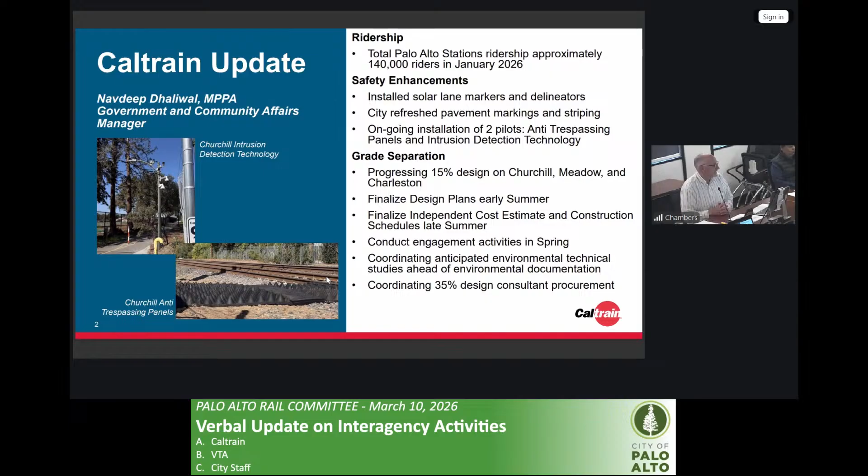So those are pretty significant changes, and there are other elements to the plan. They actually said in the report, and I'm not sure how the math changed, that the previous plan would cost $231 billion. But the headline is that they've reduced the cost by $2 billion. So I just wanted to share that and let you decide what to make of it.

Okay, so our next update is, do we have anything from VTA? No update from VTA. Okay, and that takes us to the city staff report.

Good afternoon again, Ripan Bhatia, Senior Engineer with the Office of Transportation. Next slide please. We have a few project updates ongoing that we've brought forward to the Rail Committee previously. The first one is the Bike and Ped Transportation Plan update. The draft plan was reviewed by PTC in November and recommended for adoption, and is going forward to the council review on May 7th. It's open to the public if you have any interest from the community to provide feedback. The final adoption of the Bike and Ped Transportation Plan is tentatively scheduled in early June. Next slide please.

There's another safety improvement project currently in progress at Alma and Charleston, also funded through California Public Utilities Commission's Section 130 funds. The city recently had a community meeting, late last year, seeking input and feedback from our community. It was a great meeting with good input, and staff will take that input into consideration as we move forward with the design.

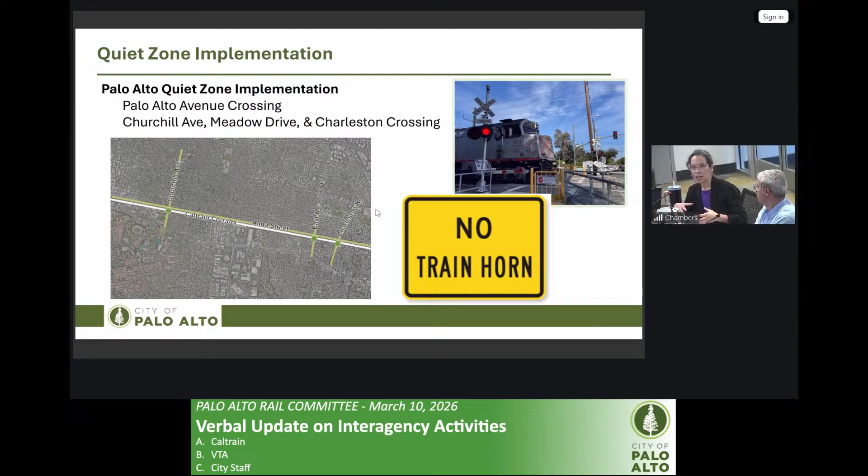So there are two different types of safety improvements. The ones Ripan was talking about are safety improvements on the city side, relating to the signals. The ones Navi was talking about are safety enhancements on the Caltrain side, including the anti-trespass panels and the sentry system. So you can speak to the plan for those.

Yeah, so we anticipate, we're pending installation for Alma Street for the anti-trespass panels, and we're expecting those within the next week to two weeks. And then for the rail sentry at Alma, we're anticipating that will be installed on March 16th. So does that answer your question?

Rail Sentry was already installed at Churchill in the spring, and in recent weeks it was installed at Meadow and Charleston, and will be at Palo Alto Avenue soon, as Navi said.

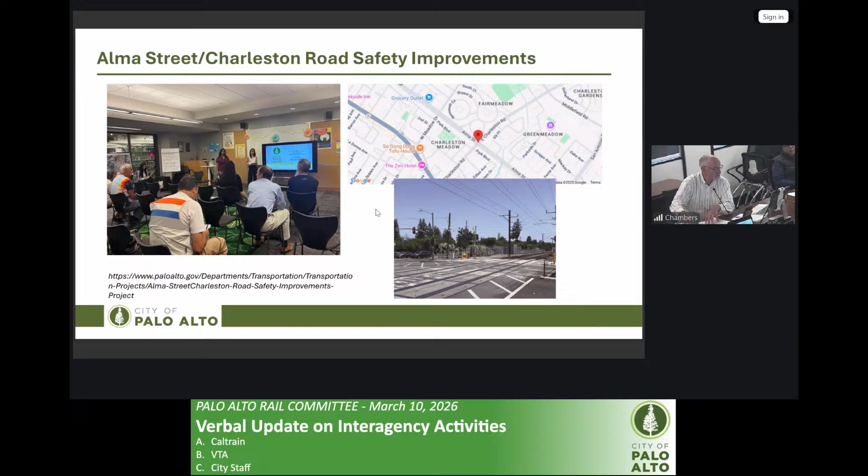The anti-trespass panels have already been installed in just the last couple of weeks at both Churchill and Meadow, and they will also be installed at Charleston and Palo Alto Avenue in the next couple of weeks.

And the rail sentry had already been installed before the latest tragedy, right? Yes. The rail sentry is a good technology, but is not designed to address the sort of circumstance that occurred recently. On top of that, even within what it is designed to do, which is to improve both safety for vehicles and prevent trespassing.

It's far from a fail-safe technology because it requires the LiDAR or video cameras to detect either a predetermined pattern of a vehicle or person being where they shouldn't be for too long, or with the AI, some irregular behavior. But then it has to go to the dispatch with the company that owns Rail Sentry, then to our dispatch to the trains and stop the train. Each of those is a lag time.

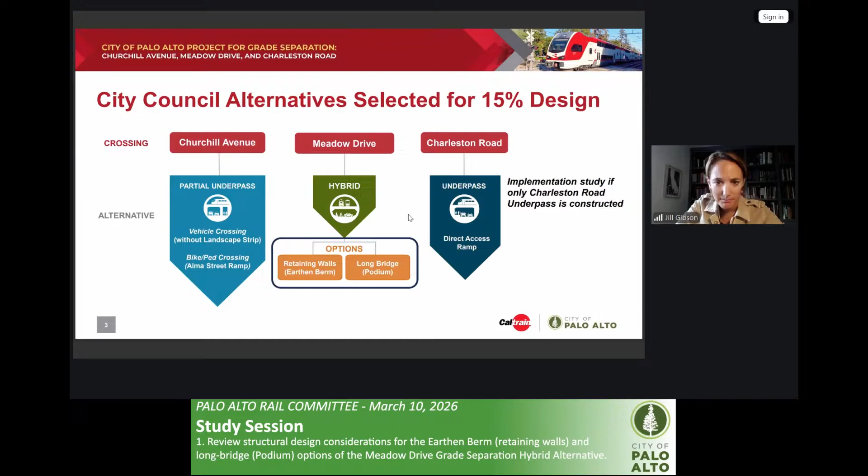So just to recap our schedule. When we last saw you, we received direction for that first arrow, direction number 1, to identify the alternatives to advance to 15%. The team is now proceeding with that direction and advancing that 15% design. Today we're checking in to discuss the Meadow Drive options. All of this is working towards the second decision point, in advance of the 35% design and environmental clearance, to provide any update or refinements on which alternatives to proceed to 35%. All of this is aiming towards concluding the 35% design and environmental documentation to be complete at the end of 2027.

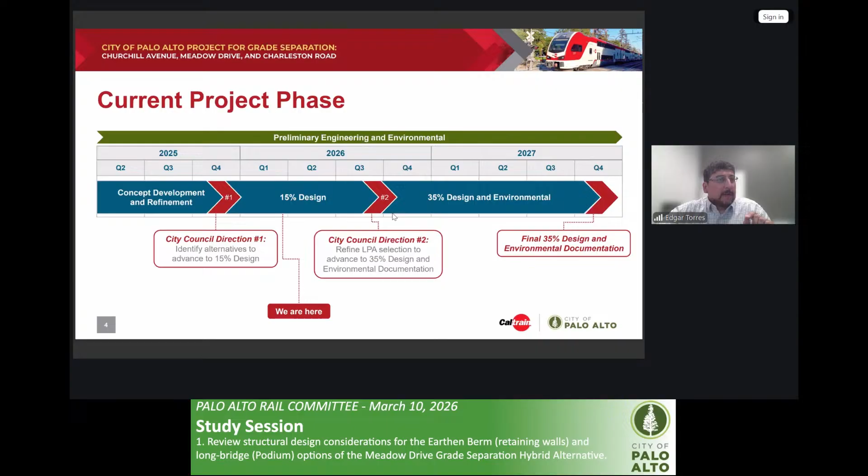Good afternoon, Chair Burt, Mayor Lauing, Councilmember Lythcott-Haims. I wanted to share a few things in preparation for this study session, understanding the design options associated with the hybrid crossing at Meadow Drive. We'll walk through this, recalling that the tracks will be going up and the roadway going down. This is in anticipation of a decision point in the May timeframe.

We are advancing both designs: the earthen berm, or short bridge, and the podium, or long bridge. This will allow us to further analyze not only the engineering and construction requirements, but also understand the costs associated with that, as we'll have an independent cost estimator, and understand the schedule and the type of equipment necessary to build either a short or a long bridge. On the screen, I wanted to highlight a few elements of the crossing requirements.

First is the fact that for the Meadow hybrid, there will be about 6,500 feet of track modification. That means either horizontal or vertical change in the track. So if the track is being adjusted anyway, we're considering that a modification. That's approximately 6,500 feet, which includes the modification necessary for Charleston Road with some adjustments there.

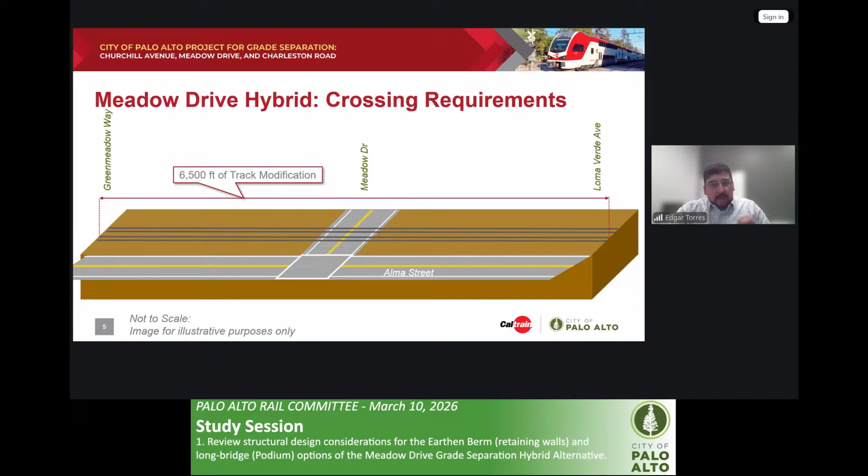For the crossing at Meadow Drive itself, there's approximately 3,700 feet of track being raised 3 feet above its existing grade. The bridge itself is about 55 feet wide as a minimum. The track will be raised 16 feet at Meadow Drive above the existing ground, as we previously shared. The road, Alma Street and Meadow, will be depressed or lowered 7 feet below the existing ground to allow for that 16.5-foot clearance beneath the bridge soffit and the roadway itself. So just wanted to provide those approximate dimensions for the group.

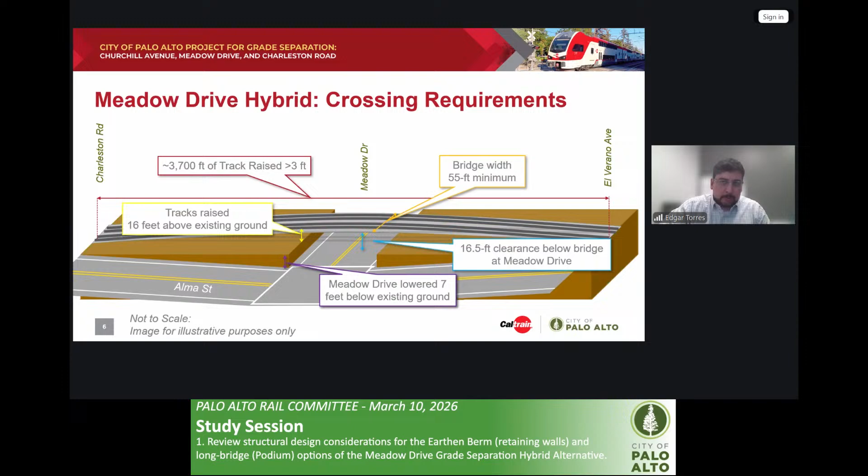At Meadow Drive, the section of the roadway and the bridge, if you recall, we looked at a minimum of a 3-span bridge, the middle span dedicated to vehicular traffic, and the side spans dedicated to pedestrians and cyclists, providing a bike lane, planting strip, and sidewalk. This is the typical section, understanding that the roadway is going to stay the same. Now what we're talking about is how far that bridge extends and what it potentially accommodates.

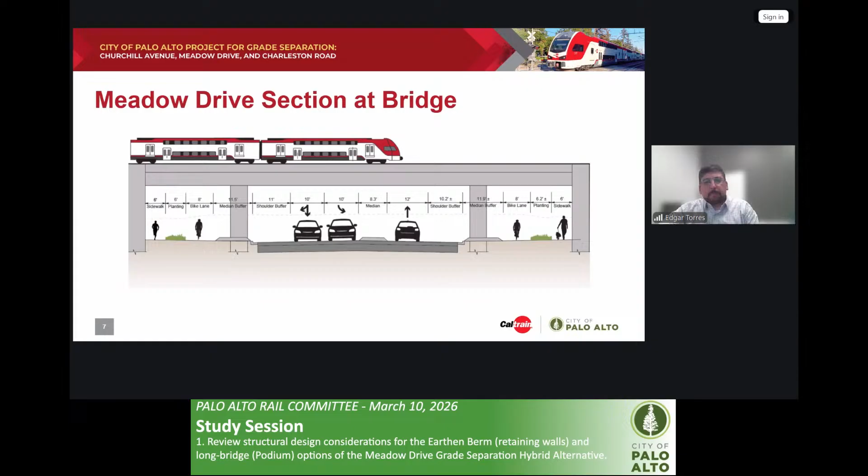The first section here is about the short bridge, or what we previously referred to as the earthen berm. We had previously shown an aerial where it's retained fill, dirt behind a retaining wall, the earthen berm itself, with the bridge across Meadow. Now we've looked at a center post and posts on either side, or a series of columns on either side. The bridge span itself, the total bridge span, is approximately 140 feet.

It could be longer, as I previously mentioned, with the clear space underneath being approximately 125 feet, with that 16 to 16.5 feet clearance—16 feet where pedestrians and cyclists are, 16.5 feet in the roadway for vehicular traffic. On either side of this short bridge is approximately an 1,800-foot retaining wall on either side of the railway, starting at 3 feet tall and getting up to approximately 20 feet high. The total bridge and wall length is, as I mentioned, 3,700 feet for that stretch for the hybrid option.

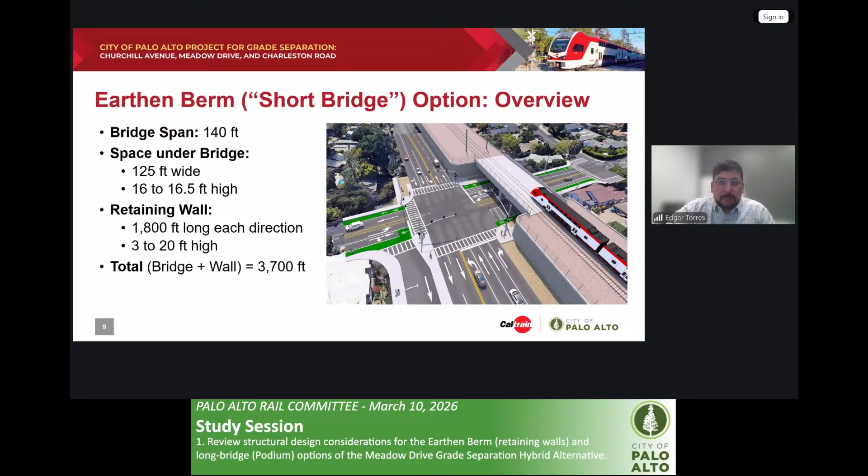In the aerial view, this bird's eye view looking down, you see the bridge width being 55 feet and 125 feet clear for the bridge extent, and the gray area being that retained fill, or earthen berm, on either side of the bridge to support the track infrastructure above.

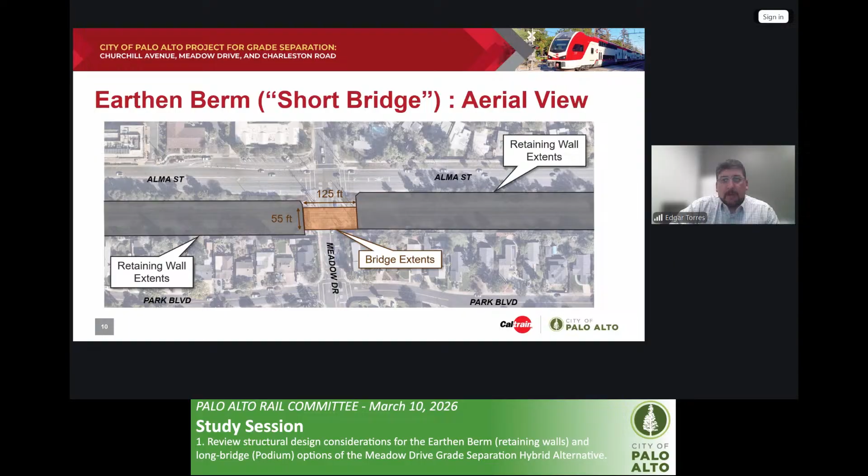In the elevation view, think of this as looking at Meadow Drive, you have the retaining wall on either side of the bridge. I'll zoom in here a bit. The bridge at the top is approximately 140 feet. This is where the track bed is, and that clear space down below is 125 feet.

The clearance underneath the bridge soffit is at least 16 feet. We're targeting 16.5. And essentially that retaining wall, from the roadway at Alma Street, or at that intersection of Alma Street and Meadow, up to the top of the wall is 20 feet.

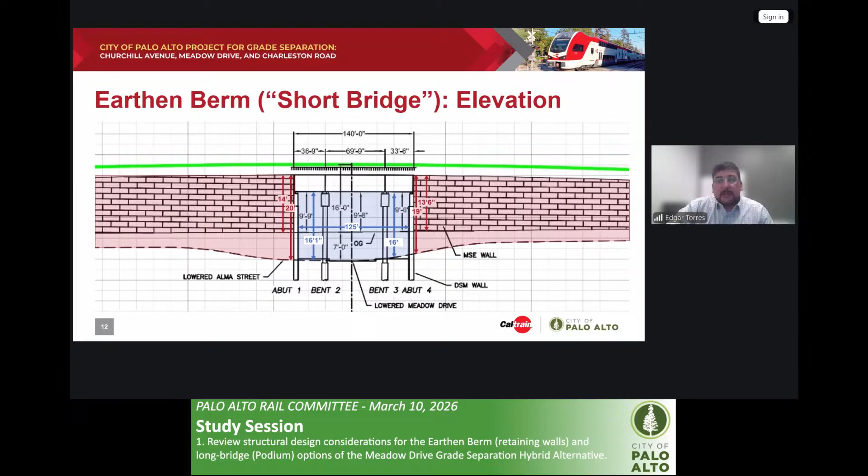Just to give an example, this is a 2-span option of the bridge at the San Bruno station, showing what a typical concrete girder bridge could look like. This is a shorter span bridge example.

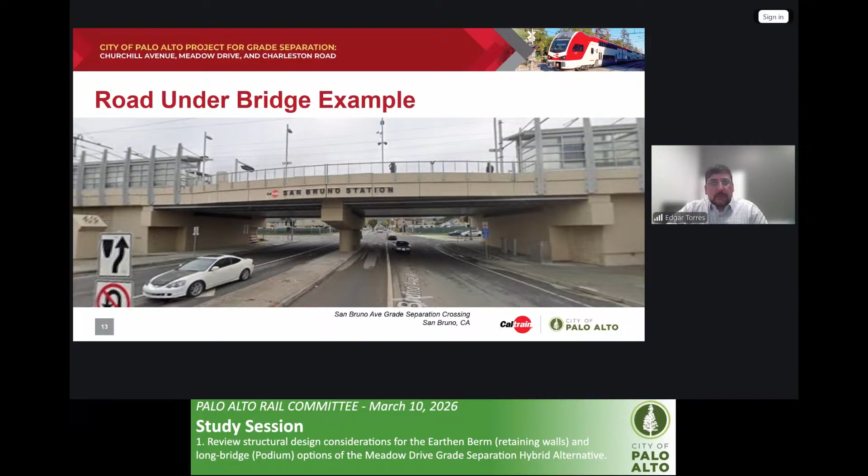For the podium, or the long bridge, this is where we looked at how long the bridge can be for this podium option. A couple of things we take into consideration are the ability to maintain the bridge. Where the abutments, or the ends of the bridge, occur, there needs to be a minimum of 8 feet for inspection, the ability to access the abutment and foundations, and to provide any maintenance and support infrastructure necessary at those locations.

So for the long bridge, we're looking at an approximately 490-foot long bridge when meeting that minimum of 8-foot clear at the ends. This leaves a space underneath of approximately 475 feet wide, or at least 475 feet along the bridge, and that can vary between 8.5 feet and 16.5 feet.

Now, if you recall, the rail is going slightly up, and the roadway is going down. That means the ground underneath the bridge does not have to change. It can be adjusted downward, or it can stay the same. That's something we'll discuss briefly.

The retaining walls would be 1,600 feet long on either side, varying from 3 to 17 feet high. The total bridge and wall length, again, is 3,700 feet, because the amount of track being adjusted is effectively the same. The variables we're playing with are the length of the bridge versus the length of the retaining wall.

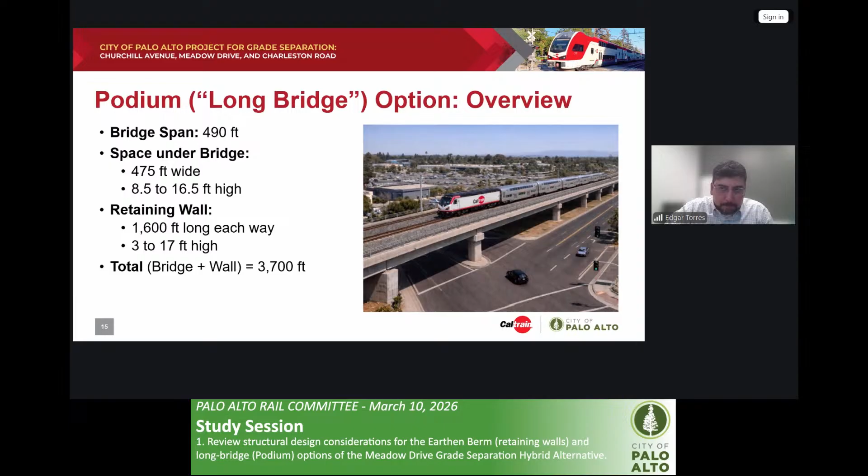In the long bridge option, or the podium long bridge option, you'll see again where that 475 feet would be placed relative to the intersection of Meadow and Alma. So it creates that longer bridge and then pushes back the retaining walls along the road about 130 feet on either side.

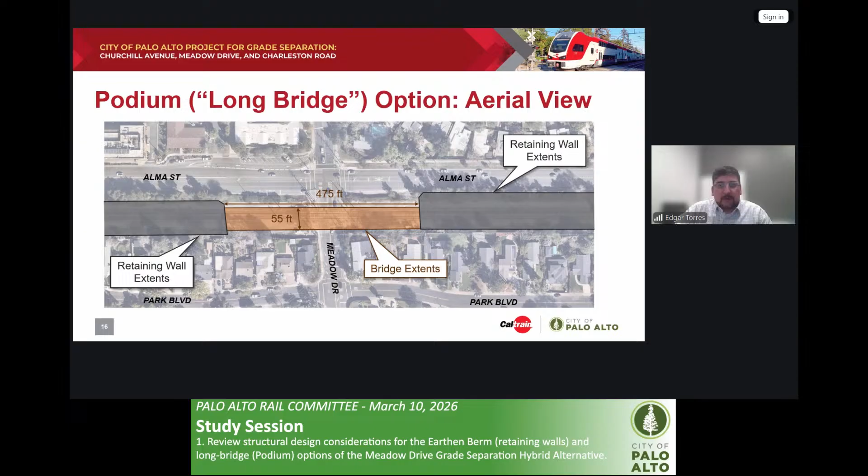In the elevation view, the clear span here is 475 feet underneath, still meeting the minimum requirements underneath the bridge. The retaining walls would effectively be 17 feet tall on one side, 15 feet tall on the other. Keep in mind the reason for that is the track elevation.

The track is not going to be flat through here. It's going to be on what we call a vertical curve, transitioning vertically up before transitioning down. And it's not centered on Meadow, it's offset from Meadow.

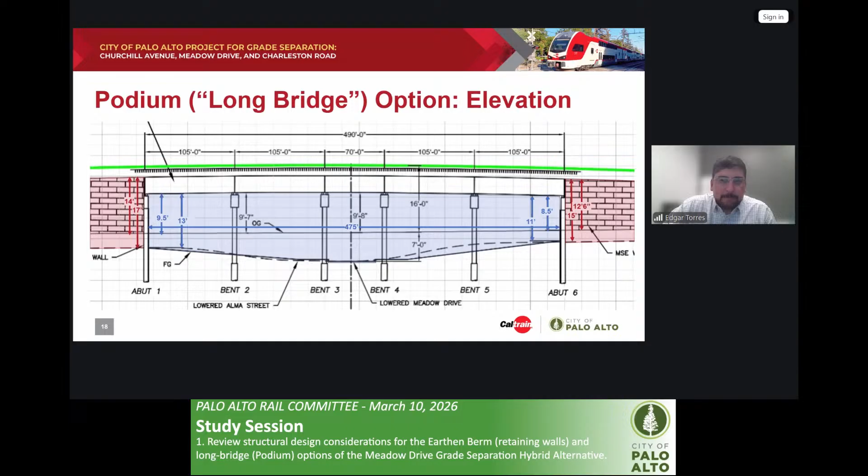Now, with the long bridge, there are options to provide different space underneath that longer bridge and adjust the ground or topography. That's something we can discuss as to whether the city would consider it worth the likely additional expense of a longer bridge.

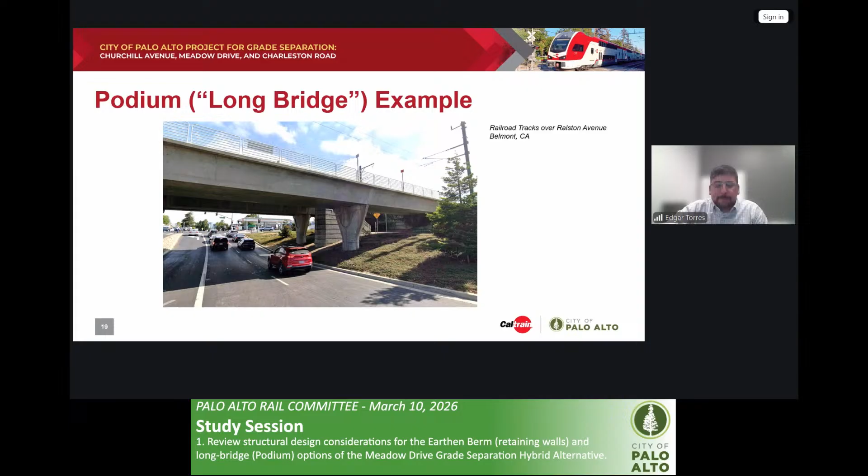Some key considerations for the group. First, we'll start with preliminary construction considerations, and I want to emphasize these are preliminary, as we will be working through constructability reviews as well as an independent cost estimate.

With regards to the earthen berm or the short bridge, we know it's going to be less expensive. Earth, bringing in dirt, building retaining walls is cheaper than the bridge structure itself. It'll take less time to construct, and it is easier, if necessary, to widen.

If necessary, the retaining wall that's there can be buried by a new retaining wall to fill and widen the space if necessary.

With regards to the long bridge, it is more expensive because the bridge structure itself is more expensive, and it takes more time to construct. It's also more challenging to widen in the future if necessary, whether for additional Caltrain operations or another function.

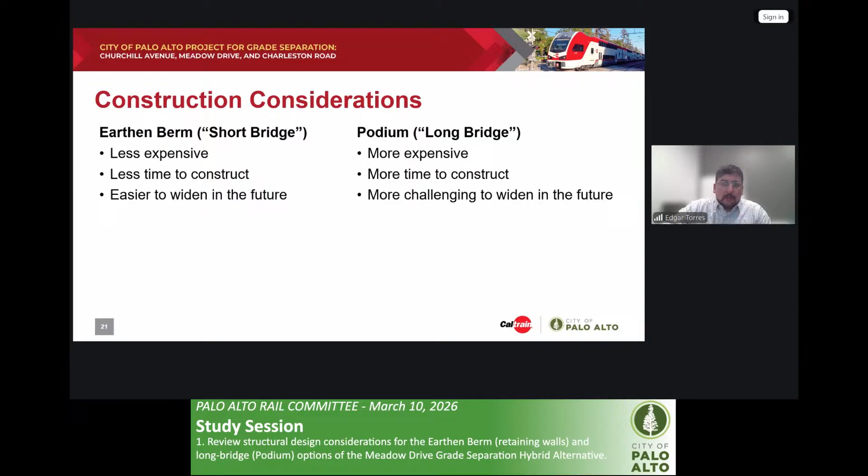With regards to maintenance considerations for the short bridge, it's less expensive due to minimal maintenance of the retaining walls. There are still regular inspections necessary for structural integrity, and track tamping or releveling, meaning filling in the ballast so the track remains well supported. There's generally minimal fatigue due to the earth pressure buffer, meaning less pressure on the wall or structure, and there's always weather exposure on one side that has to be inspected.

The transition zones, where we go from retained fill for the earth to a bridge, think of the earth being more flexible and the bridge being stiffer. There needs to be a transition space that's monitored so the train, as it goes from softer ground to the firmer, stiffer bridge, doesn't experience too much settlement that could lead to rail breakage.

Effective drainage design is critical. Please note that transition zones are required for both the short and long bridge because there will be retaining walls on either end of those bridges.

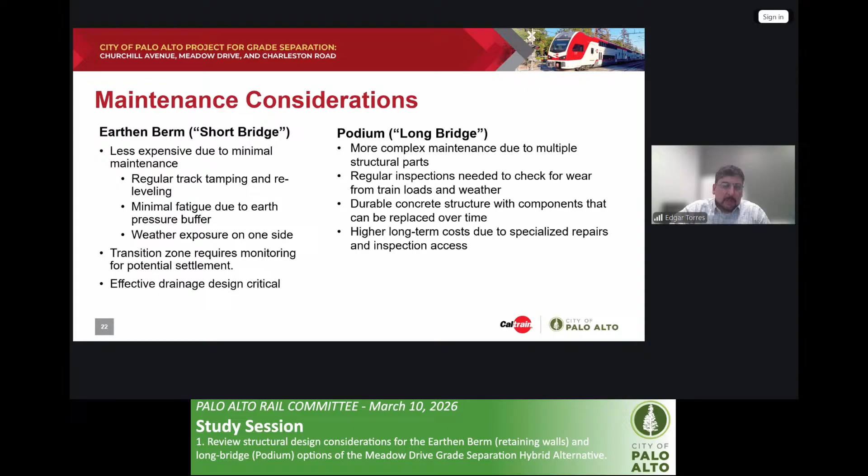What we're talking about is the length of the bridge itself over Meadow and on either side of it. Either way, there will be retaining walls and a bridge. The question is how long between the two.

With regards to the retaining walls, there are ways to do textured or treated wall facades, integrated planting or green screening, or potential mural or public art treatments as appropriate. The space underneath the bridge, whether short or long, will need landscaping, integrated lighting at the roadway and active transportation or ped and bike facilities versus outside those spaces, and architectural treatments of the columns themselves.

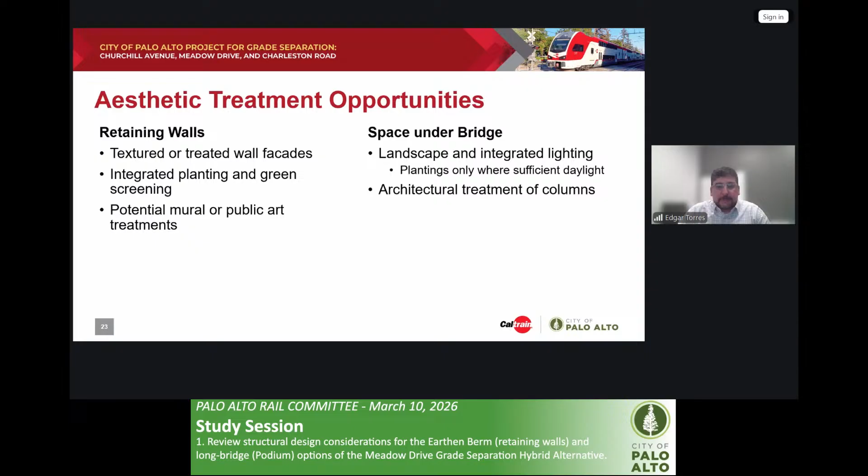Just a few examples, not exhaustive, as there will be more discussion on treatment types as design progresses into 35% design and final design. There are ways architectural or landscape treatments could soften or break apart the cadence or length of the wall.

The example on the left is in San Carlos at the station itself, and the example on the right is at a multi-use path along a highway, showing a much longer retaining wall.

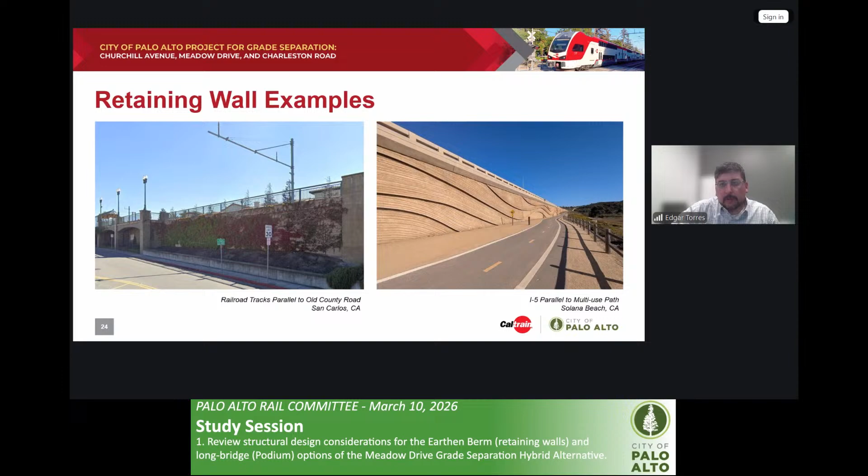Some summary of the considerations, and we're glad to answer questions in more detail: for the most part, what we're discussing is how long the bridge will be. We're looking at least a 120-foot wide bridge for the short bridge as one end of the bracket, and 475 feet long for the long bridge as the other end, still leaving 1,600 to 1,800 feet of retaining wall on either side.

Construction costs are generally lower the shorter the bridge is, and maintenance costs will likely be lower as well. The aesthetics will depend on what's done with the space outside the roadway and active transportation space, and any open or available space beyond that. Future corridor expansion, if necessary, is easier with the short bridge and more difficult the longer the bridge is.

And go ahead, Jill, just in conclusion, kind of the 6-month look ahead. So the team is advancing the 15% plan development, as Edgar mentioned, soon to be starting the construction's cost and schedule development. And then again, here discussing Meadow Drive today, and then in May, anticipating coming back to discuss the 15% design update, and then walk through the elements of the 35% scope.

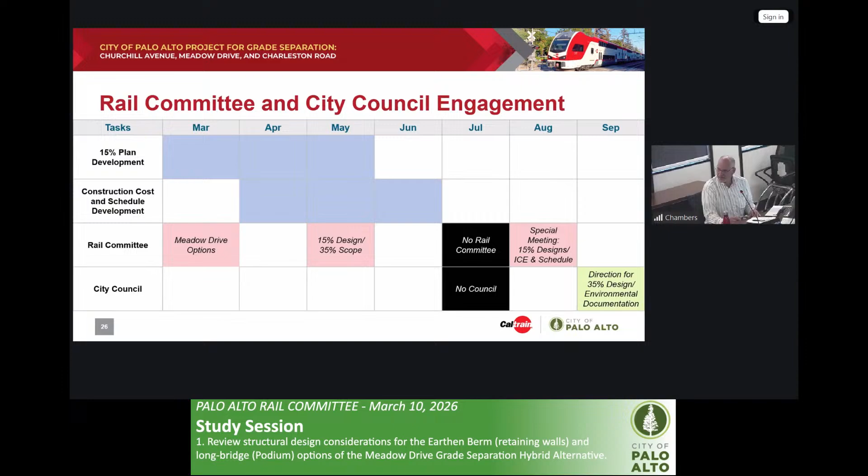Thank you. So why don't we first see if we have any questions to staff, then we'll hear from the public and then have our discussion. Any questions? Ed? I think this qualifies for what you're asking for.

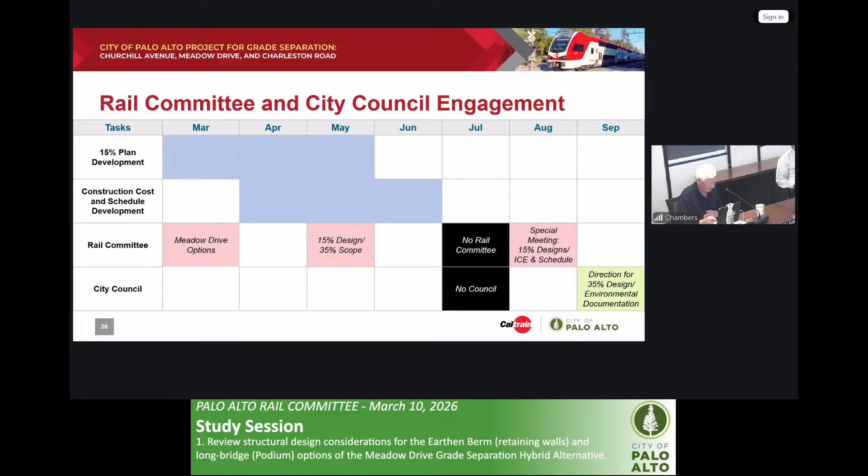You went through these things and I had written down basically the slides that you presented with respect to the considerations, except that I also wrote down, besides how much does it cost, how much longer is the construction. The third thing I wrote down was eminent domain. So is there any difference in eminent domain for either of these?

There is no difference in the additional property needed. That's kind of what I expected. So if you just look at the considerations side by side, I'm not seeing much in favor of the longer bridge. So the question is, what did I miss? Because there's so many more advantages of lower cost and lower construction time. Is there anything substantive that we think is arguing in favor of the long one? And we can ask other questions later.

I think that the key advantage is some people find it better aesthetically. As somebody who was in favor of the concept of the hybrid option, including an earthen wall or a podium, it was coming out of the viaduct mindset. A viaduct would be a higher podium, basically. And we were told that this hybrid could also include a podium style support, which does then, it's not just aesthetics is a piece, but it's also the sense that maybe there's more light, maybe the eye at the level of cars and bikes and peds can see through for a greater distance, which the longer earthen wall does not support. So I think that's what we were trying to correct. I mean, Pat will have his own views on this, but that's kind of where I was coming from, with some enthusiasm about this aspect of the hybrid option.

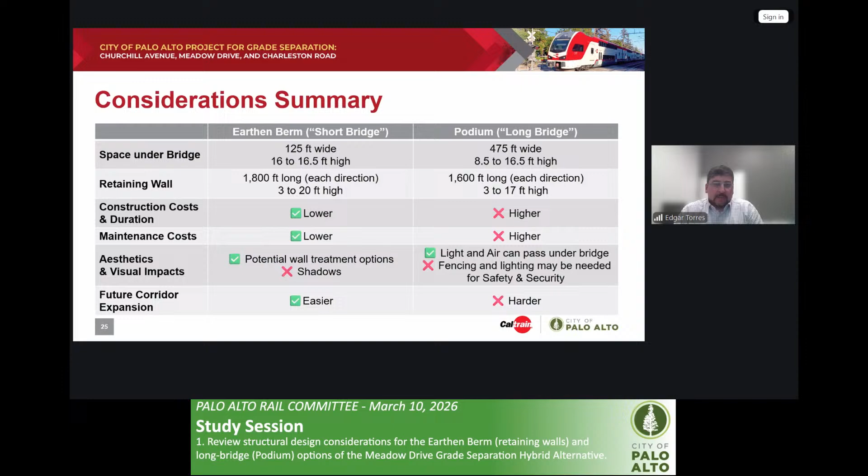That's correct. I'll provide some clarification here. We are looking at the possibility of either being constructed independently if necessary due to funding, as well as them occurring at the same time, to see if there are any economies of scale or construction efficiencies that can be presented to the City Council. Thanks for that reminder.

But I'd like to add, I think our understanding is that it's going to be underpass at Charleston and hybrid at Meadow, but they could be built separately or together. So that is my understanding. I'm not sure if we were doing a hybrid at Charleston, because that would have different layouts, especially for the transitions and embankments. If that was the case, that was not my understanding of the council direction. Well, I think we'll want to review that.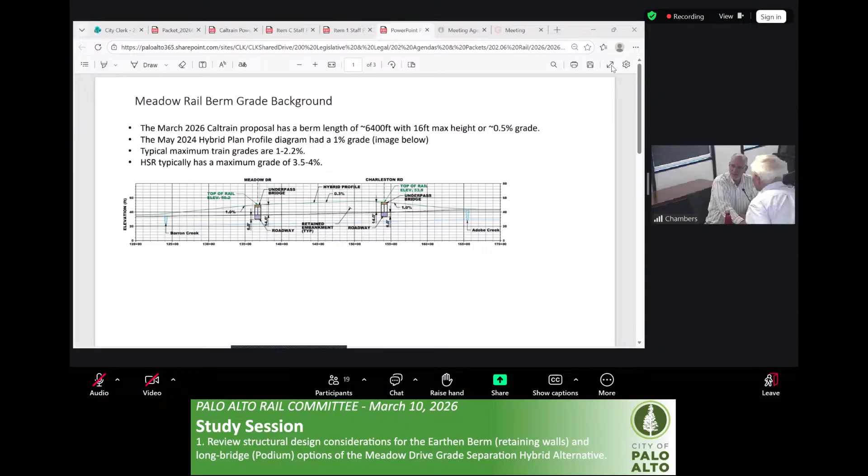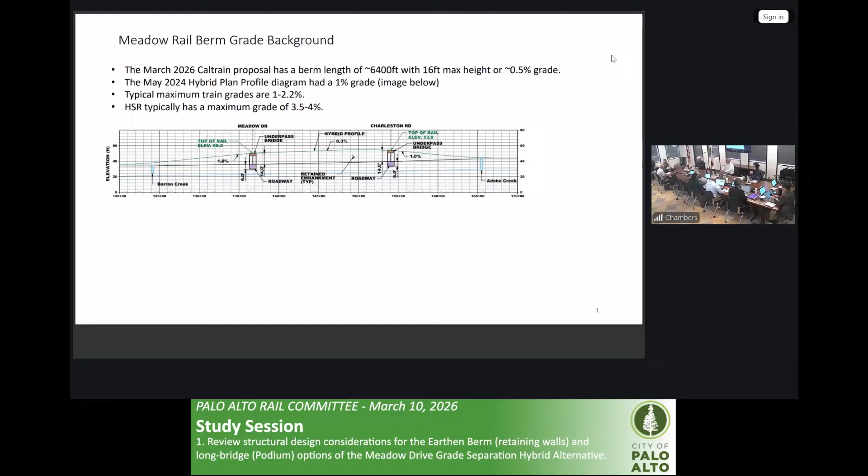I wanted to talk about the grade issues associated with the berm. The most recent Caltrain proposal had a berm length of 6,400 feet with a 16-foot maximum height over the ground, so 3,200 feet over 16 feet ends up being a 0.5% grade. The May 2024 hybrid plan profile had a 1% grade, as you can see in the image below. Typical maximum track grades are 1 to 2.2%, although they do go up to 4.7%. High-speed rail typically has a maximum grade of 3.5 to 4%. So there are various grades.

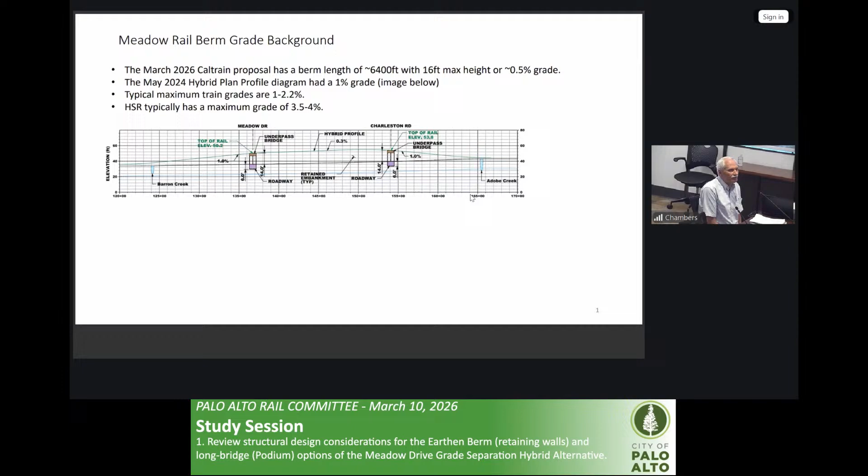The comment on the long bridge — I have a daughter who lives in Portland, and they found that they needed to place large rocks underneath the bridge structures to keep people from camping there. So it's something to consider when you're talking about what we're going to use that space for. Thank you.